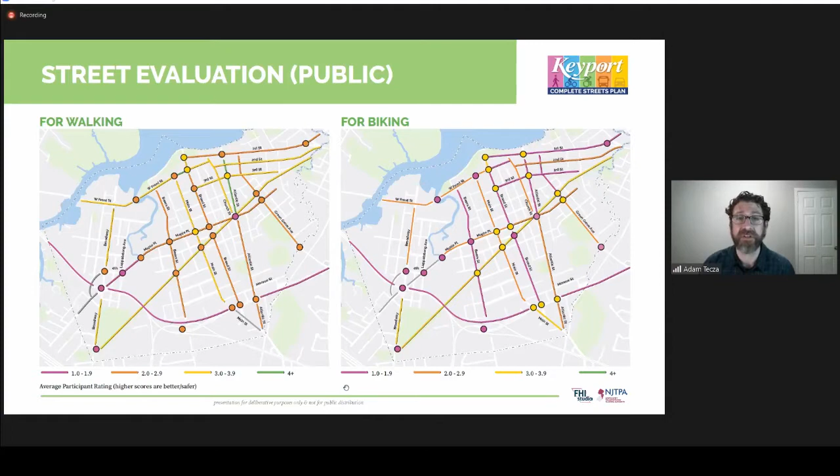In response to some questions about how streets could be used going forward as a result of COVID-19, and what lessons have been learned, we got a lot of really good feedback. There were a lot of comments about the desire to see outside dining continue, making sure connections to the Henry Hudson Trail were important, and that parking could be an issue if you're going to use streets for outdoor space. But connecting to the trail and the trail to downtown could help ameliorate some of those concerns. So, all really good feedback throughout the process.

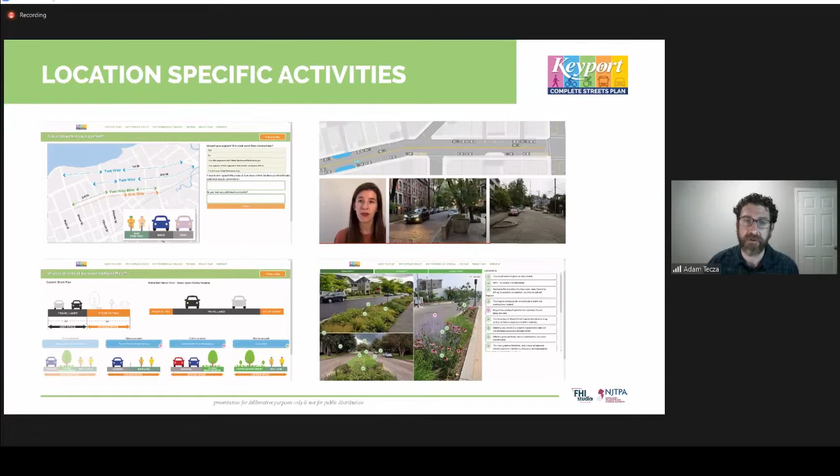In addition to that work, there were a lot of location-specific activities, especially in the workshop, which I'm going to highlight as we get into each of those streets and street typologies.

Before we get into the actual draft recommendations, I want to give everybody a top-level overview of the products we're going to be creating. These are the tools you'll be using to help implement complete streets. There are four documents: an ordinance, which includes a policy, a complete streets design guide, an implementation guide, and a review of the land use and subdivision ordinance. I'll go through each of those in more detail.

The ordinance makes complete streets the official policy of the borough. It establishes the design guide as the official regulating document, establishes the Complete Streets Advisory Committee, and outlines processes for public participation, project prioritization, exemptions, and reporting. This is a document the council especially should take some time with, because ultimately the expectation is that this will be adopted, and it sets the framework for the rest of the documents that follow.

Then there's the design guide, which I'd call the meat and potatoes of this work. It establishes design guidance for all streets, existing and future. It includes bike and pedestrian network maps, and provides guidance on design tools—bulb-outs, bicycle parking, mid-block crossings, and how those should be designed. It also identifies priority interventions on every street typology.

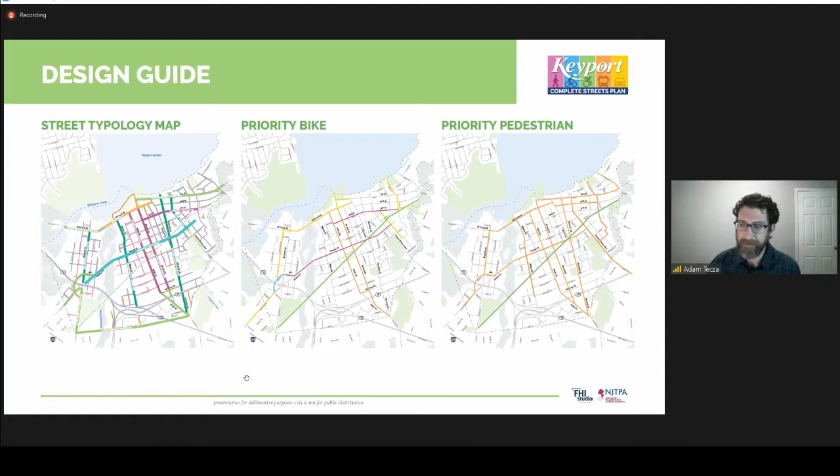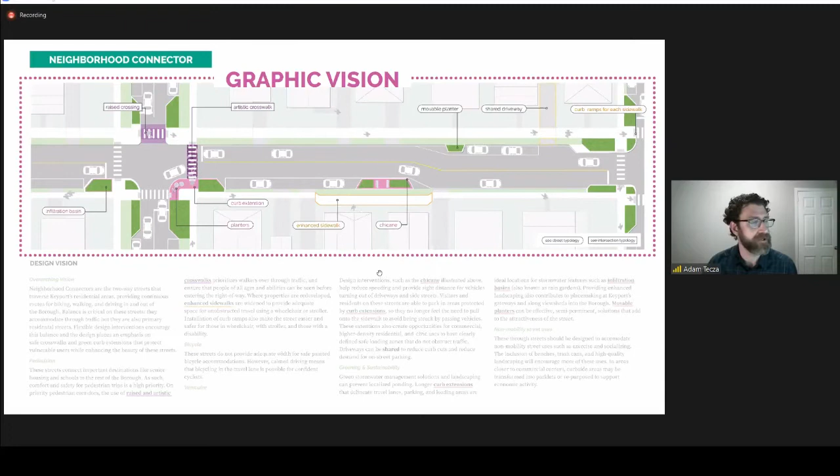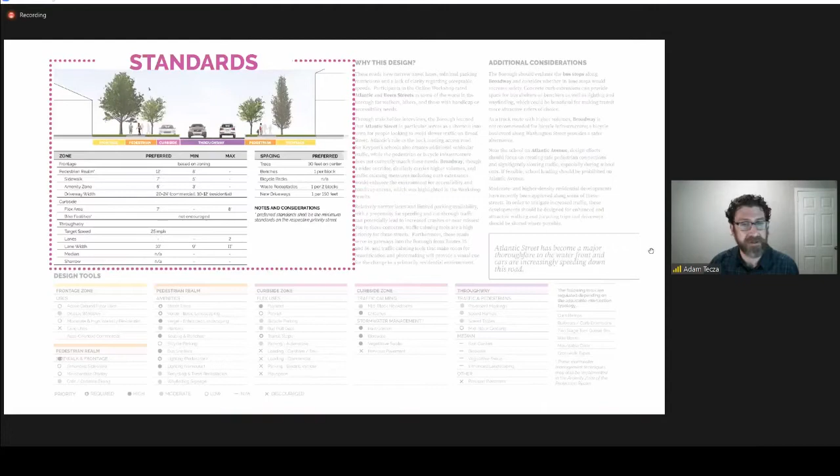Each typology will include a graphic vision of how the street should be designed, a narrative description of the goals and objectives, the vision for the street, a set of design standards talking about the street in cross-section, a number of design tools identified as required, high priority, moderate priority, or low priority, and background information that will help during implementation, including why this design was selected and additional considerations for specific streets throughout the borough.

In addition, there's a whole section giving specific guidance on things like how to install bike parking, what types should be used, where they should be located, and how much passage space needs to be given off of sidewalks.

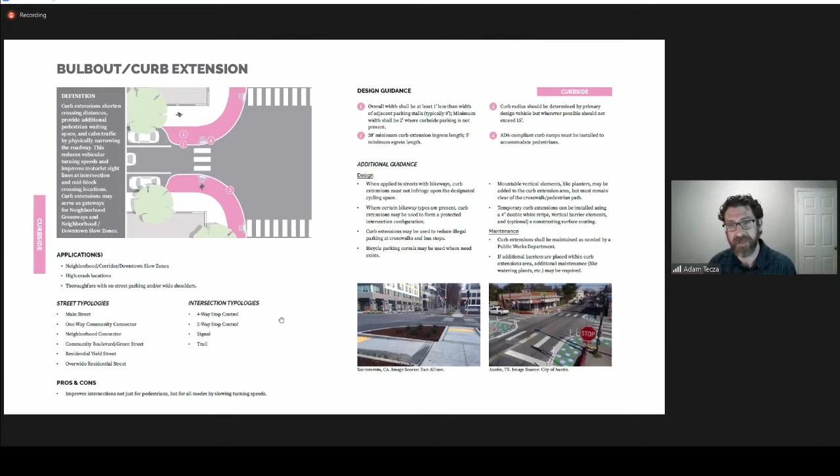Same thing with bulb-outs and curb extensions: design guidance on where they're applicable, what street typologies they apply to, and the pros and cons of using them. So there's a lot of guidance and information tied back to each street typology in the design guide.

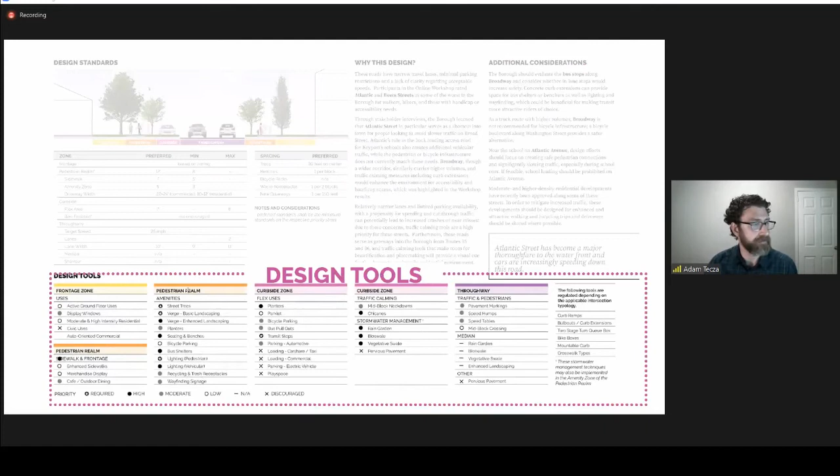The next big deliverable is the implementation guide. It identifies the implementation strategy, project deliverable pathways, how to prioritize projects, and a lot of detail on what to do now that you have this design guide and ordinance—how to actually make this happen in a sustainable way.

One of the tasks we were asked to do was look at the land use and subdivision ordinance and provide direction or suggestions on modifications that might support complete streets. All of that is addressed in the land use and subdivision review report, which covers parking considerations, bicycle parking considerations, and a complete streets checklist. It doesn't really get into land uses, which we saw as outside the domain of this project.

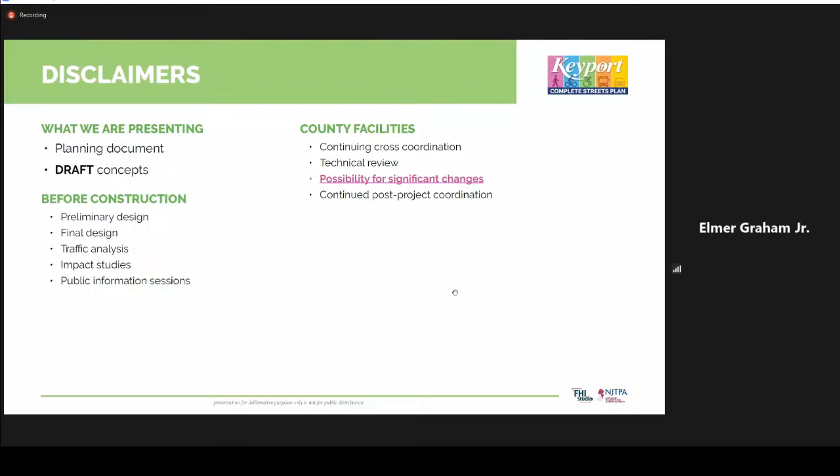Before I jump into the rest of the work, there are some real disclaimers I want to put on everything I'm going to show today. First and foremost, this is a planning document, not an engineering document. Everything we're presenting is very feasible, but that doesn't mean you can go out and build all of this tomorrow.

There's still a whole design and construction process that would happen for every street, including preliminary and final design, potentially traffic analysis, impact studies, and certainly public information sessions. So there's a lot more work before everything is sorted out on the ground, but this gives you a huge head start in that process.

Everything I'm presenting is draft right now and open to modification. With respect to county facilities, it's important to understand we're still doing cross-coordination with the county, so everything is very much in the air. We can't commit that there's support for any of these concepts from the county at this point, and as a result of that coordination, there could be changes that come out of that work that we don't know yet.

We have a lot of faith in the work we put together, but as many of you know, working with the county requires a lot of back and forth, and they have their own concerns and issues we'll need to address as part of that.

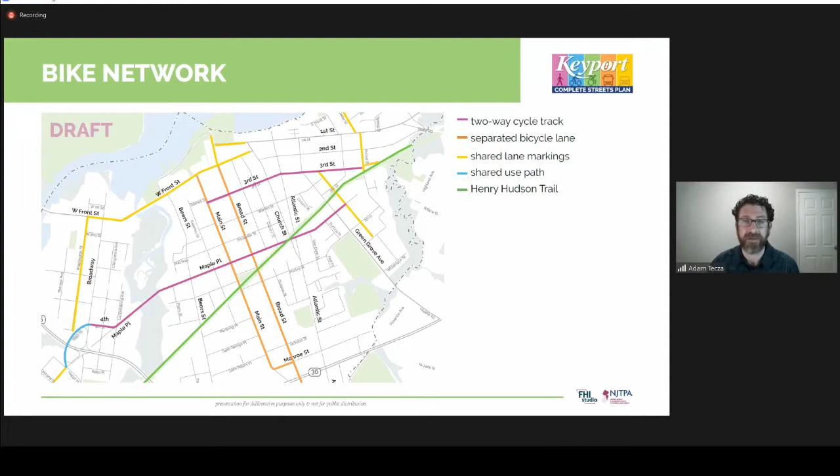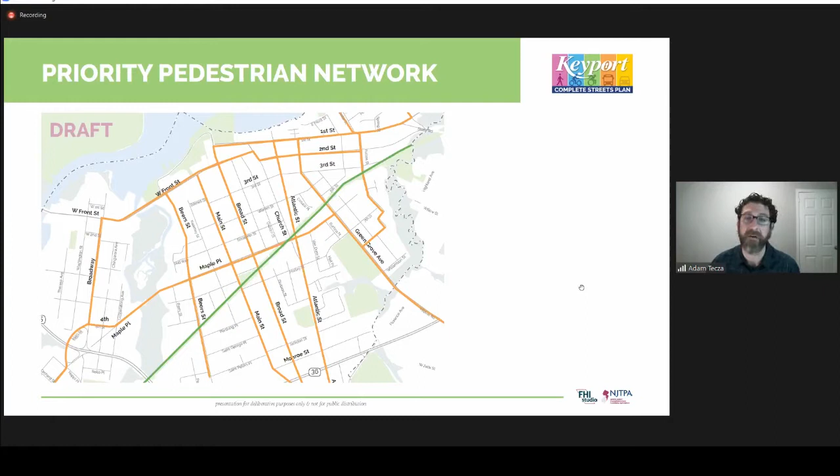Also a priority pedestrian network—again Broad and Main, with a lot of north-south movement, and Maple Place identified as a priority pedestrian street. These are all streets that would carry high levels of traffic. That's not to suggest other streets wouldn't be used by pedestrians, just that these would be the higher volume or more important pedestrian streets.

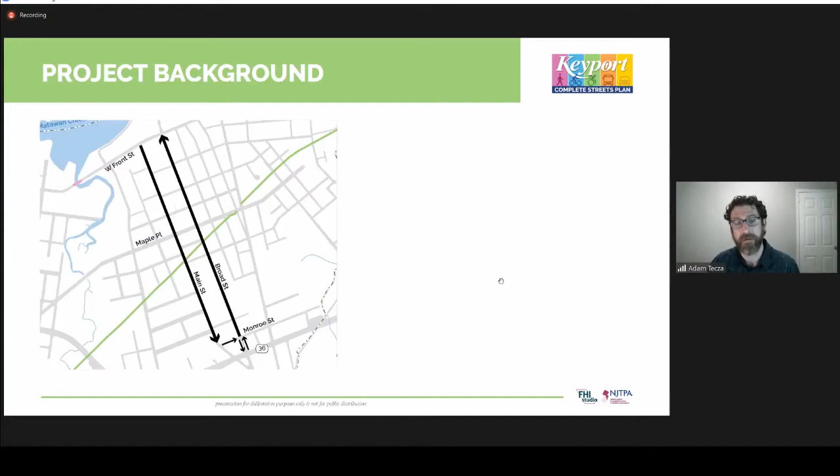So Broad and Main Street, as many of you know, there has been a discussion for a while about a one-way pair on Broad and Main Street that would create the opportunity for enhanced bicycle facilities. As part of the workshop, which I know a number of you participated in, we put out 3 concepts for that: a standard bike lane, a protected bike lane, and a cycle track option.

There was really strong support for both the protected bike lane and the cycle track. Green is to very strongly support, moderate support, and this dark orange is strongly disagree, and the light orange is moderate disagreement. As you can see, there's considerable support for those 2 options, not a lot of support for a standard bike lane.

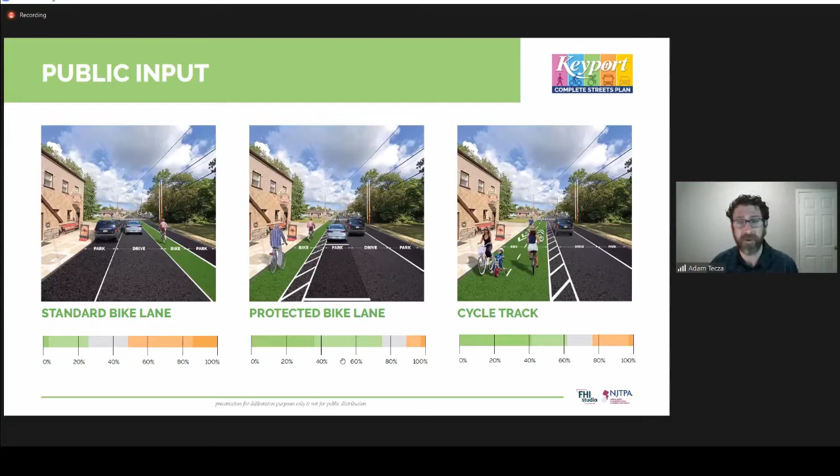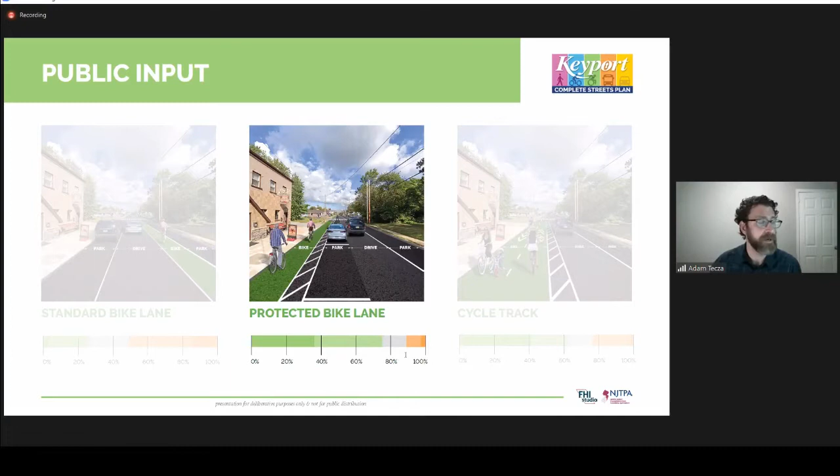And as we dug into this in a little more detail, we really saw the protected bike lane as the best option for a number of reasons, including a number of technical reasons. So we started developing that concept, and this is going to be a lot to look at all at once, I know. But this is the first draft of the typology that would regulate that area.

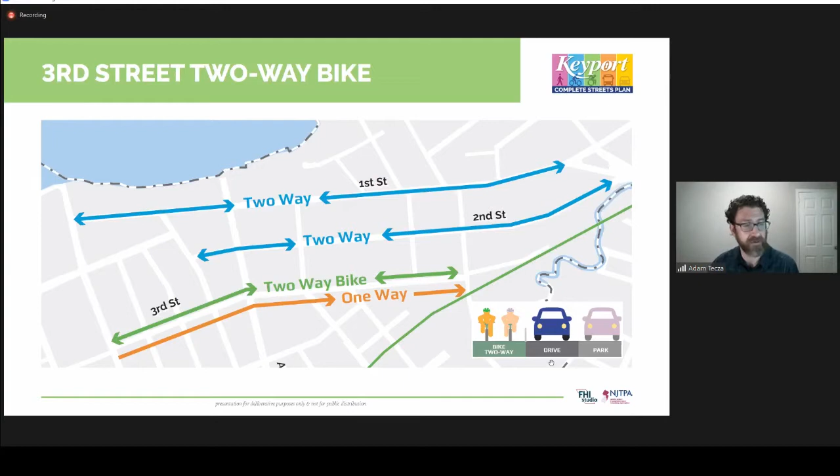So the other topic we were looking at was 3rd Street, how to make this east-west connection closer to 1st Street. And we put out as part of the workshop this: leaving 1st Street as two-way, leaving 2nd Street as two-way, and really converting 3rd Street to a two-way bicycle facility and a one-way eastbound drive lane. This is the cross section that was shown at that.

There was incredible support from the people who participated in the workshop. Lots of yeses, or some yeses with some changes, but just, love it. It's simple and makes sense. This is a fabulous idea. We need more bike paths and less on-street parking. I love this proposal. I thought this comment was really good, that it may cause some inconveniences to residents, and there's going to need to be engagement with people who live on that street. We certainly agree with that.

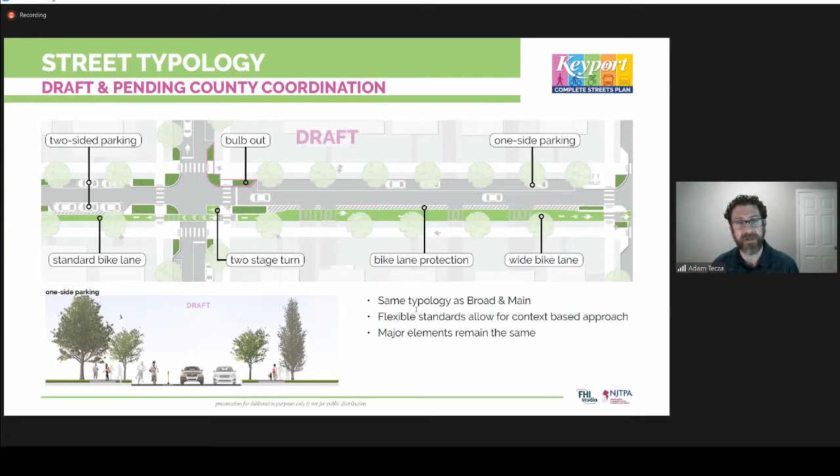So this is an example of how the typologies work. That same typology that I showed you on Broad and Main Street applies also to 3rd Street. But because the standards are flexible, they allow for a context-based approach. So you're not going to have two sides of parking, it'd really be one side of parking. And this bicycle lane actually would likely be a standard bicycle lane, or would be two there. So there's lots of opportunity here to customize these standards to the specific conditions on the ground.

So the next place we want to get into is Maple Place. As many of you saw in the workshop, Maple Place is really a wide street that's significantly underutilized right now. There's about 22 feet dedicated to travel lanes, and that has to be there. But the rest of it, 24 feet in some places and more in others, is really underutilized or unused. So what we asked people is, how would you allocate that unused space to stormwater management and bike lanes, to parking and bike lanes? What would be the breakup of that?

What we found is that there was a lot of support for parking, stormwater management, and bike lanes, or stormwater management and bike lanes together, but very little support for just parking and stormwater management, or parking and bike lanes. As a result, we can infer that biking is a priority, and that stormwater management is as important as parking, if not more, to those who responded. Respondents preferred a balanced approach, and we think that's the right path forward on Maple Place.

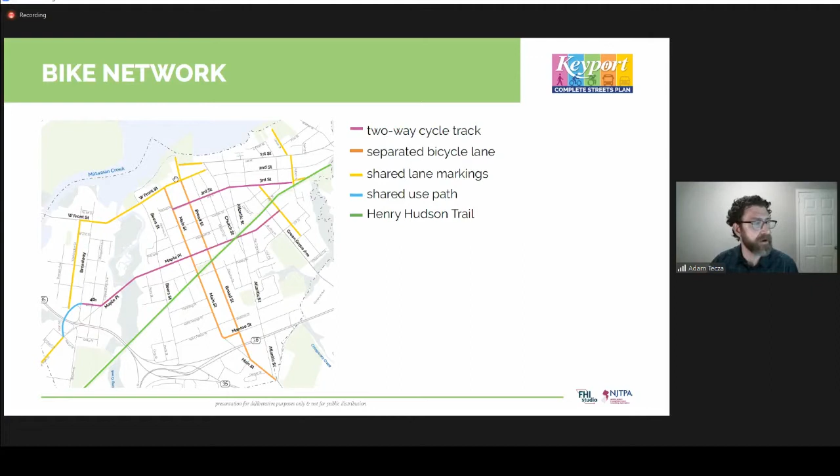Going back to this bike network map, Maple Place is a really critical east-west connection across the borough. It's one of the few places where you can make a connection from the areas west of the waterways to the area east, getting people from this side of the borough into the center and up and down Main and Broad Street. So it's a really critical connection here.

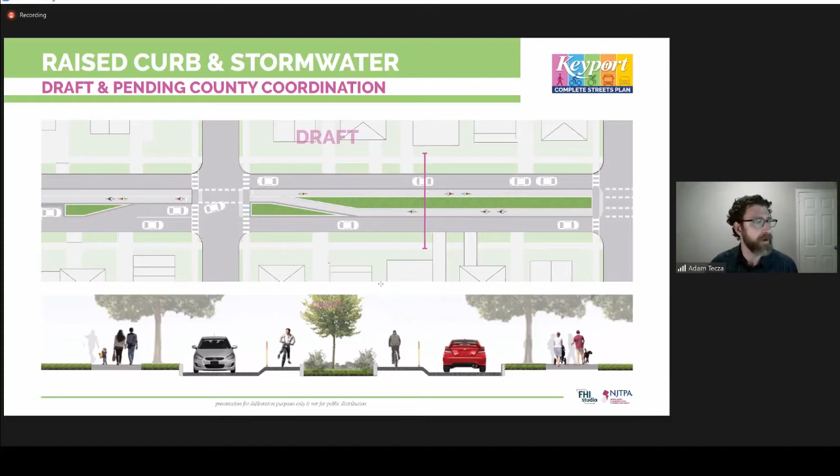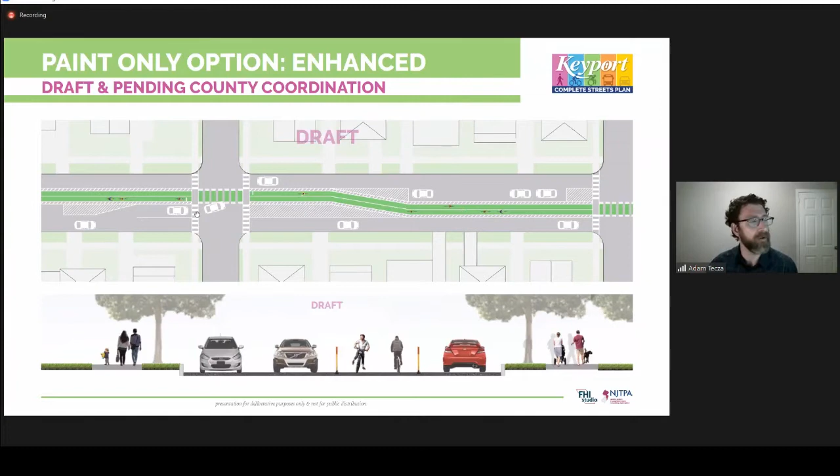The most important thing about this solution is that this paint option can very easily be a phase one, and all of these options — the paint option, the raised curb, and the stormwater management system — can be mixed and matched based on the conditions and the funding available when you go to implement it.

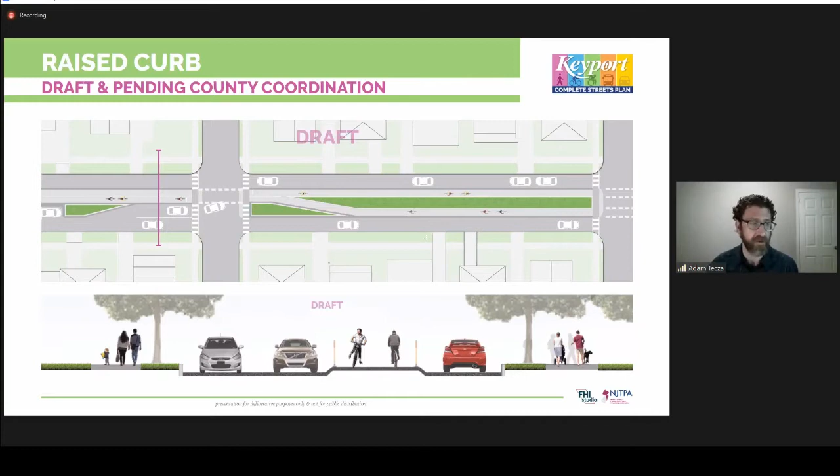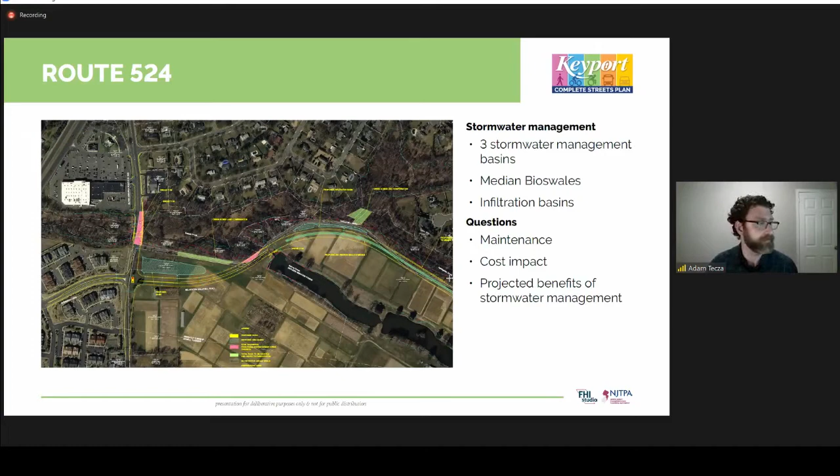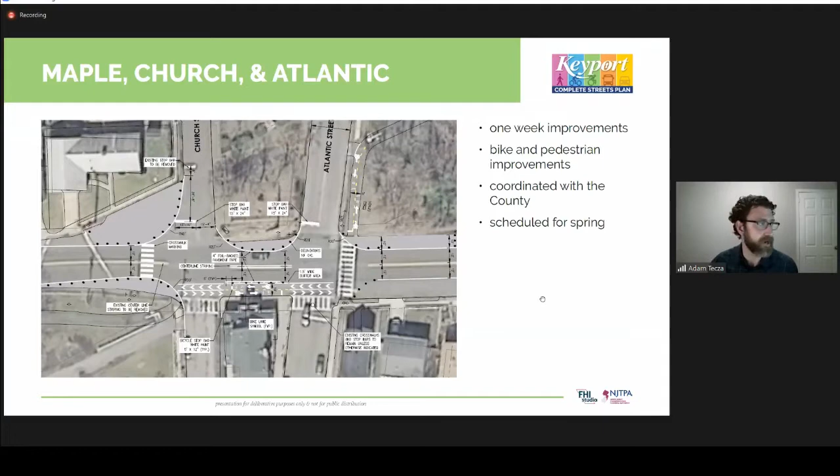I promise, 2 minutes away from the end of my presentation, and then we can get into the fun discussion part of all of this.

Next steps: the public and council have documents that they can review. There are 4 documents—the Complete Streets Ordinance, the Implementation Guide, the Land Use and Subdivision Review, and the Outreach Summary. All of those are on the borough website or can be downloaded at keyportstreets.com; they're up now if you want to download them. Please send all your comments to Jay, the borough administrator, at administrator@keyportonline.com by Monday, March 22nd at 9 a.m. That's about 2 weeks for you to review that, which we think is sufficient time. Some of these are pretty heavy documents, so I don't suggest you try to do them all at once, but I think you can get through them in that time frame.

We're going to be meeting with the county and getting some feedback from them. The design guide is not yet public and is not yet in draft form because we are still waiting on those meetings with the county in order to be able to release it. So if you're looking for what's going to happen on my street, that isn't ready yet, and we will be notifying everybody when that document is ready for review.

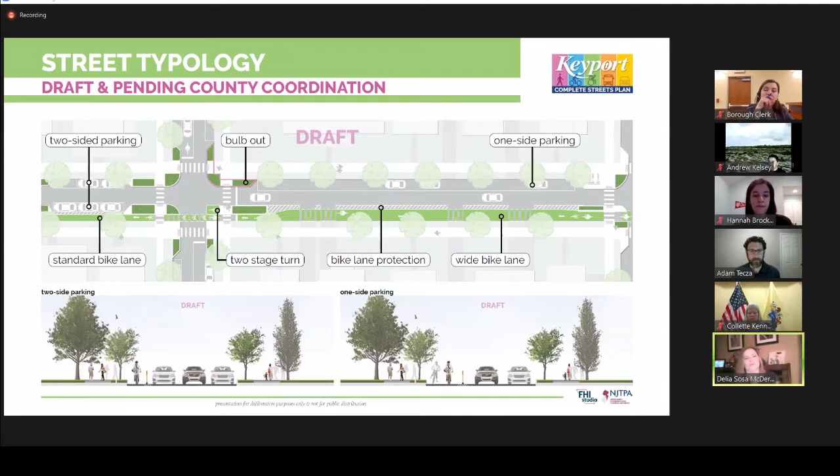And just one more question. One of the other things is we also have a commuting hub, so we have a bus terminal that's on Green Grove, and then that goes all the way up to Hazlet and actually extends out to Aberdeen. Is there long-term conversations to bridge that as well with this complete streets plan, so that people can bike or walk to the train station and bus stations? I know it's going to take a connection with the other towns and things like that.

I was going to say, Hannah, do you want to? Right, I'll take that one.

So we did look at the overall transit connectivity and how to make those connections. We raised that in conversations with the county and also with New Jersey Transit, and had a stakeholder conversation with them very early on. Part of what's informing our decisions about priority walking networks was really about that connectivity to transit, and similarly with the bike network. We're envisioning the Henry Hudson Trail as an additional link, and we raised conversations with the county for Aberdeen Station, making that seamless connection. Those walking and biking networks along Green Grove, along Broad and Main to get to Hazlet, and along the trail and down Maple Place to get to Aberdeen, are critical, we think.

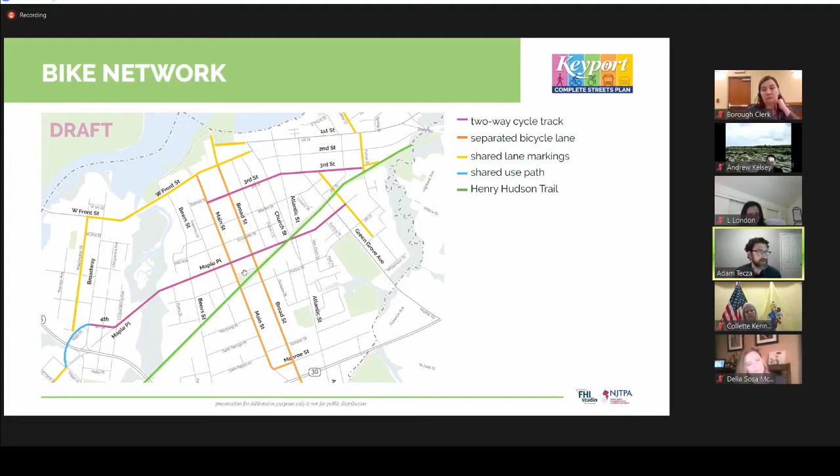I do want to take a moment to talk about this because I know how important it is. The school is right here on the bike networking map. One of the things we think is really great about this pair is that as the network gets built out, any student in the entire borough will have less than two blocks where they wouldn't be on some sort of bicycle facility to access the school. If you're in this section of the borough, you can quickly move up and get on the Henry Hudson Trail, come up Main Street, cut across on Jackson, and cycle back to school. Likewise, people who live over here—we think Washington Street is a really interesting, low-key shared facility. You can quickly move up, get on the Maple Place bike route, come in on Main Street, and cycle back in. So there's been an attempt to provide bicycle connections to the school as much as possible.

When it came to priority pedestrian networks, we wanted to make sure all the areas where you'd access the school—really Atlantic Street and Broad Street from the pedestrian perspective—were identified as priority pedestrian networks. That would mean, for example, at intersections you'd have higher quality crosswalks creating more visibility for students crossing, with potential for raised crosswalks providing even more support. We wanted to make sure that connection was always there, and that it wasn't just about getting to school—students after school could go downtown to the riverfront, get to the parks, do things students do after school, hang out with friends at different places, without having to get picked up in a car and driven there by their parents. Sorry for the long-winded response, but I wanted to make sure we touched on that.

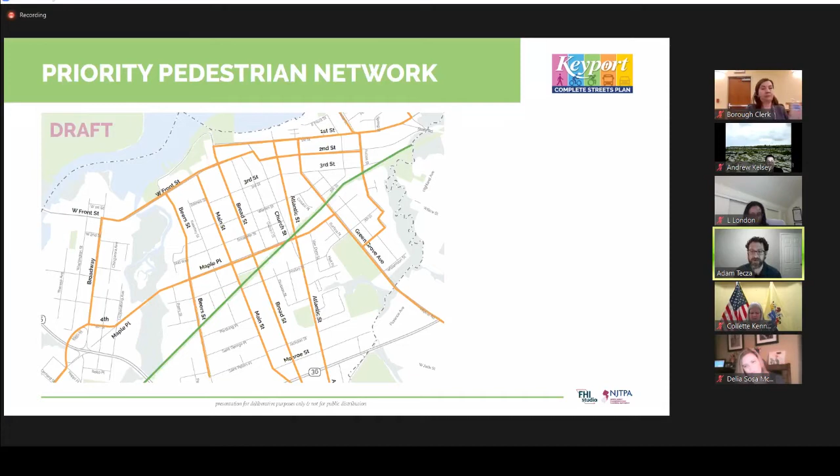Thank you for going back through that. So then moving on to Maple Place—there's, as you know, between Beers and Luppatatong, a bridge that dips down. In your conversations with the county, has lifting that bridge been discussed?

And if it is lifted, what happens with the tractor trailers? Because I live directly on Maple Place, and tractor trailers come flying by all the time, generally speeding. A huge concern of mine is having pedestrians and bicyclists in the middle of Maple Place, not to mention heavy traffic going both directions at the few intersections we have, as well as people backing in and out of their driveways. Yes, the street is wide, but for people who drive larger vehicles, backing in at a 90-degree angle into their driveway doesn't seem like enough space to turn safely while worrying about pedestrians, traffic, and parked cars all in the same area.

So I guess, what has the county said so far about tractor trailers and removing them? We haven't had those conversations with the county. The county has identified this as a truck route and has continued to say that, from our understanding, this has been a truck route. We can raise that question again to understand why Maple Place is a truck route and see if there's any give on that. But honestly, I think that's something that will need to be a continuing conversation between the borough and the county after this project ends.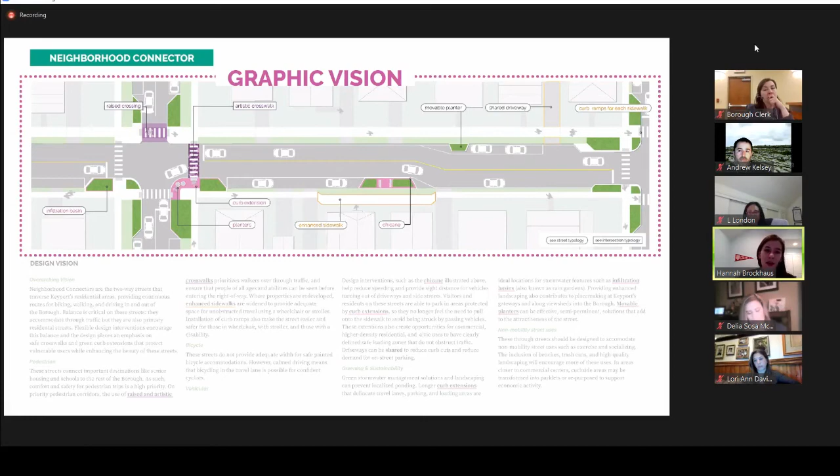The only thing I'll add is that we really see traffic calming as only one of many solutions that need to be put in place for people to feel safer on the streets. Our experience has been that heavy traffic tends to be not just a factor of volume or speed, but also how close you are to that traffic - where it is in relation to a buffer, like a parking lane or something like that. So we've tried to use a variety of solutions to make pedestrians, bicyclists and drivers safer, from an actual perspective, and also feel safer from an experiential perspective.